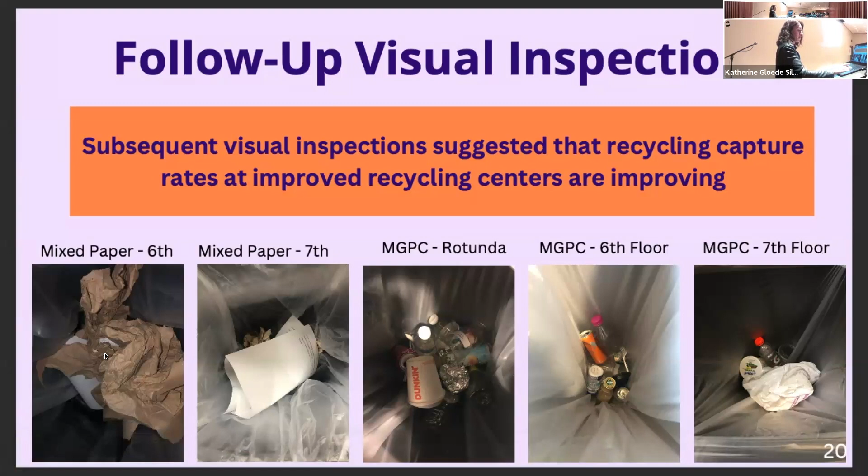We also focused on the second pillar, campus energy. We had many meetings, and I know Arthur is here from facilities. We had many meetings with the facilities management group to try and figure out what the building was doing in relation to energy management. We found out at the time that there were...

projects that had been implemented throughout the school to make it more efficient. Something called variable frequency drives had been upgraded, which is part of the HVAC system. There was a survey being done at the time, although it hadn't fully been green-lighted, to install LED lighting throughout the campus, and some of the buildings already had LED lights.

Also, we found out through this process and through facilities that there was a plan to install solar on the campus. And well, at the end, we'll announce.

And then there was the third pillar that we focused on, which was culture change. Actually, I feel like today here we can see the fruits of our project. Having you all here was part of what we had hoped we would be able to achieve.

So we hosted many events. We had an initial decarbonizing event. There was a sustainability public service announcement screening event, so on and so forth. We also put digital messaging throughout the building on many of the screens.

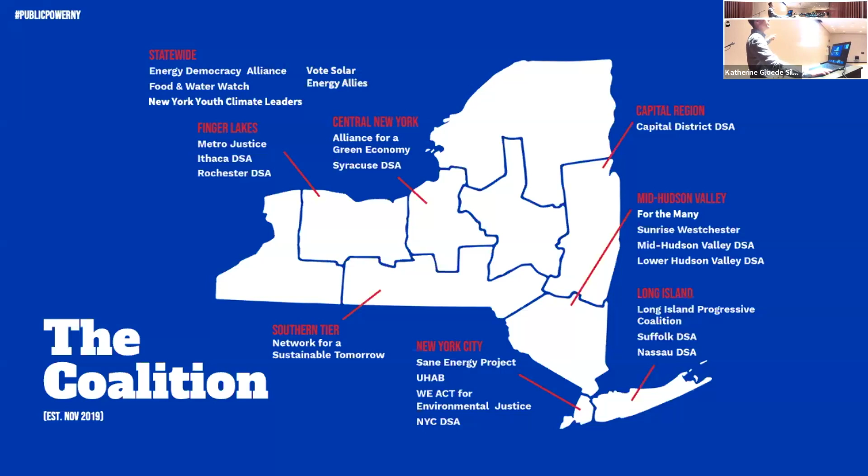And you can see it's a pretty heterogeneous coalition that we put together. It involves a lot of environmental justice groups, conservation groups, and a lot of political formations, including quite a few Democratic Socialists of America chapters around the state. It also involves our union here at CUNY, the Professional Staff Congress, as well as other unions. But PSC was really in the lead in getting a lot of other unions on board. So thanks and kudos to PSC.

All right, what were we doing? What was our goal, and what were we trying to intervene in? We're trying to change the grid. Now, the grid, as I've found over the last 5 years during my time as a public power activist, is really complicated. It's the biggest machine ever invented by human beings, basically. And there's a lot that goes on, a lot of technical stuff for a humble humanities professor like me to try and understand. But there are some basic points.

The grid has 3 key elements: generation, transmission, and distribution. And all of those things need to be coordinated carefully, because if you have too much generation and not enough consumption, or vice versa, the whole grid would crash and you'd have brownouts, which have life-threatening implications. Think about a hospital, for example—if the power crashes, people could be on the operating table, and suddenly it goes dark.

And this is also an environmental justice issue, because when the grid is not well balanced, what do for-profit companies like Con Ed do? They cut power to working-class communities of color. So those communities end up as the sacrifice zones in order to keep the broader grid going. We need to think about all of this as we fight for a democratic and just energy transition.

Our campaign decided that the best way to make this change and to basically decommodify the grid, to turn it into a public good that works for all of us in a just way, is to turn to an already existing public power authority. And that is the New York Power Authority, NYPA, the largest publicly owned utility in the US.

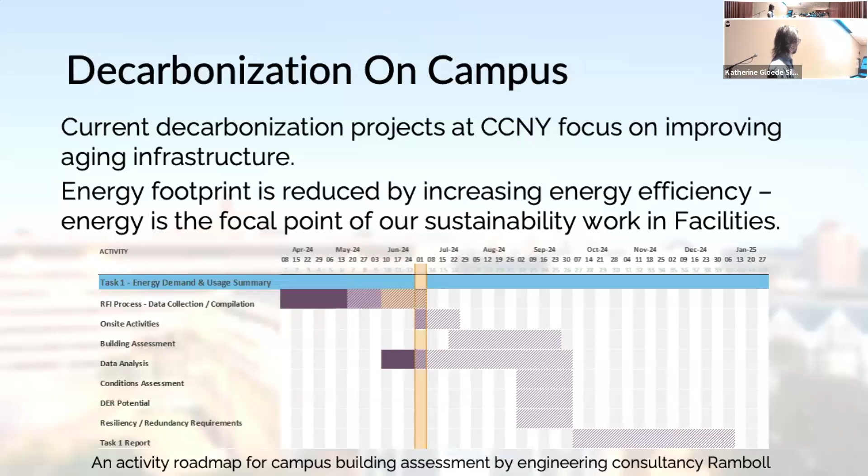We've decided that the main way we can do that is by improving our energy efficiency.

We're looking at variable frequency drives on our motors to improve the efficiency of our HVAC system. That's mainly because we have a physical plant that either completely cools the entire campus in summer at maximum efficiency, or heats it in winter. We're looking to address demand and use and be more efficient in general, so we're not running our motors at full blast all the time, whether heating or cooling.

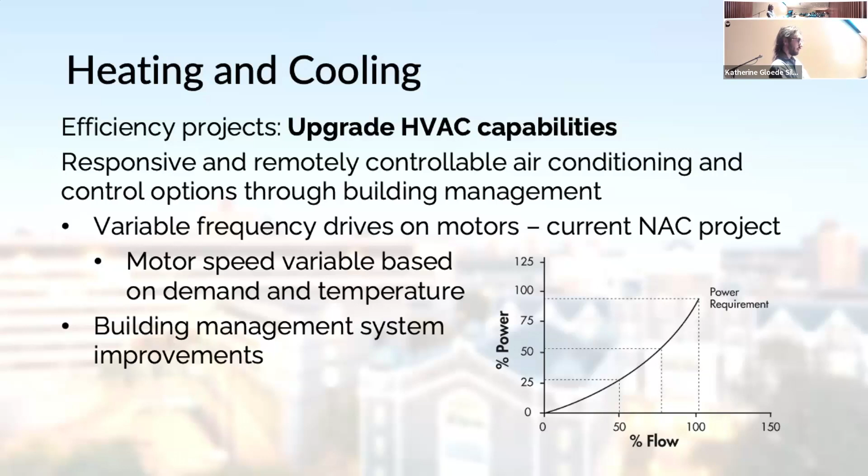To that end, we'll also be connecting everything to our building management system. We'll have professionals who can manage it better — this is just another way of improving our energy efficiency.

We've also got photovoltaics, solar panels. Today we're starting construction fencing at the parking lot, and then we'll go through a month of site work, after which we'll start building the panels. Within our first phase, we'll have electric vehicle chargers, energy storage, and the arrays. It's not the grand plan we have for the future, but it's our first step in having photovoltaics on campus at all.

We're looking into other electric vehicle charging stations, following Local Law 97 and Executive Order 22 to reach the 2035 goals of having all our vehicles be all electric. From there, we're moving with our light duty vehicles, the facilities use vehicles, and then our buses, which are running on natural gas right now.

These are our scope 1 emissions, not commuter emissions, waste emissions, etc.

Following that, we have our governance structure that has to push all of this forward. We can't do it on our own — we have to rely on the executives, operations, and planning. The governance council was established several months ago. They've had their first meetings, and it was a big milestone for us to get everyone in the room at the same time.

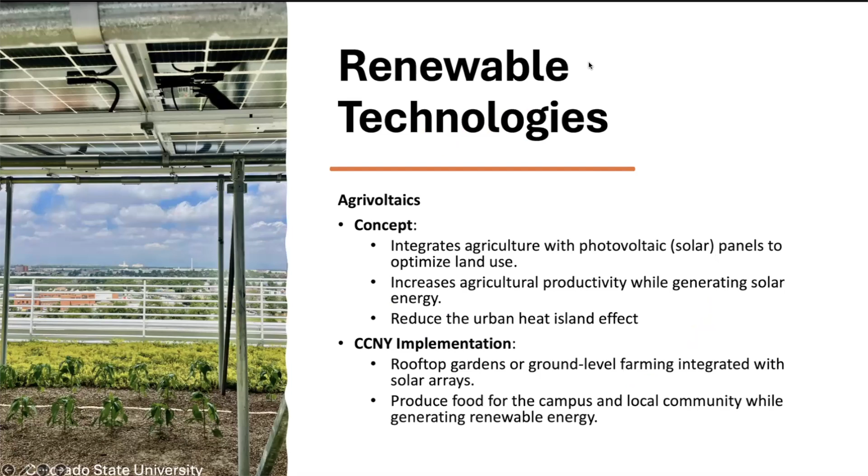Some of the technologies we're looking into: agrivoltaic panels that can be installed onto the roofs with small gardens that can produce produce for our campus cafeteria, and they also provide green roofs, which can contribute to lower urban heat island.

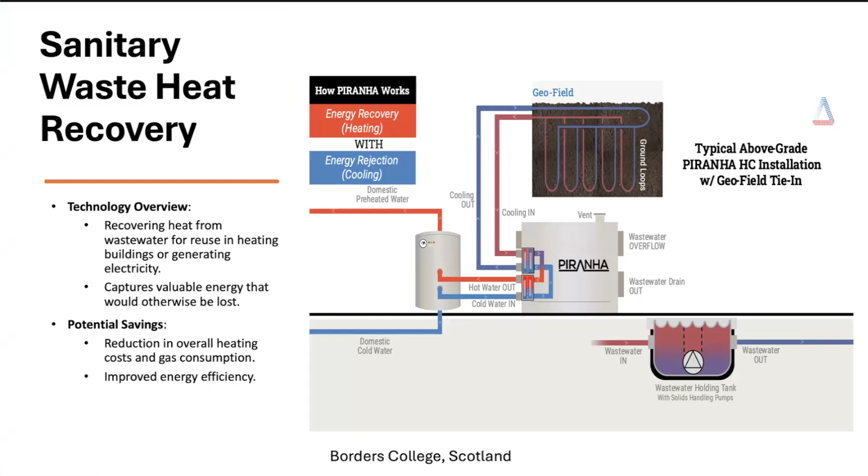Also, we can collect the sanitary waste heat from water and recover that for energy, as well as collect all the food scraps, as we've seen in the previous presentation, to reduce waste - which is going to be mandatory on all buildings by local law 22 by 2050.

It's an executive order - waste needs to be reduced, and we're proposing a biodigester on campus, which Jason is working on right now, to reduce waste, produce renewable energy from the gas collected and turned into energy, promote sustainability, and improve soil health, as this byproduct can be used to fertilize the soil on our green roofs. This is very cost effective environmentally, and it's a great educational tool on campus.

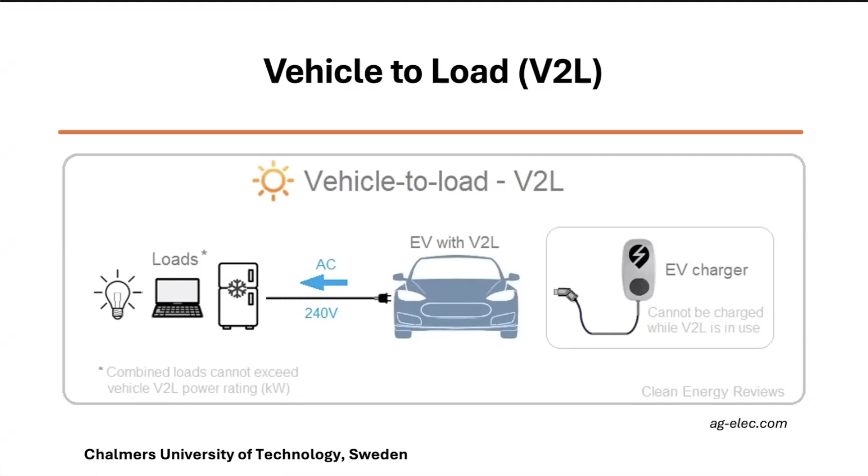Also, hydrogen generation - rainwater from the roofs can be collected and turned into hydrogen energy that can be used to provide vehicle-to-load and vehicle-to-grid energy. Vehicle-to-load electric vehicles can store energy and then provide energy to energize appliances or other systems, and we can all benefit from this. It's time to become more sustainable and less electrical-energy dependent.

I'm going to give it over to Jason - he's going to introduce these technologies into the grid right now.

I want to talk a little bit about why these technologies were selected and how we would implement them - the idea that we're going for here. So what we're looking to create are sustainable closed loop systems that rely on waste products to generate either heat or electricity. We want to take all the energy coming into campus, extract as much as we can, and keep it here. We want to incorporate these sustainable loops all around campus.

So this is loop one - the agrivoltaic loop. You can see we have a biodigester. The agrivoltaics rely on the PV system with the green roof - basically installing a green roof on the NAC with solar panels above it, and then collecting the organic waste from that to feed the biodigester, in addition to feeding it with organic scraps from the food facilities around campus. That would go into a combined heat and power plant.

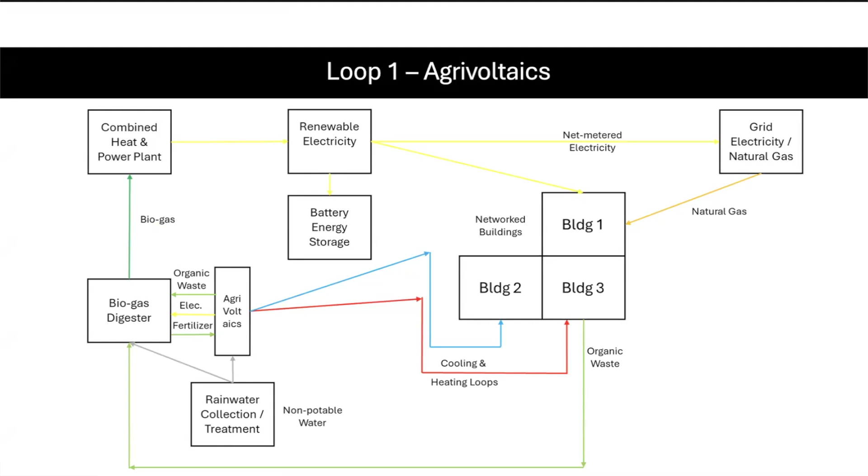The technology we selected for that was mainspring linear generators - a new technology out of Stanford which, using adjustable compression ratios, can operate off of natural gas and hydrogen, or a combination of both. It's a very versatile technology that allows you to generate electricity right on campus, and it's low temperature combustion, so it reduces NOx and SOx emissions.

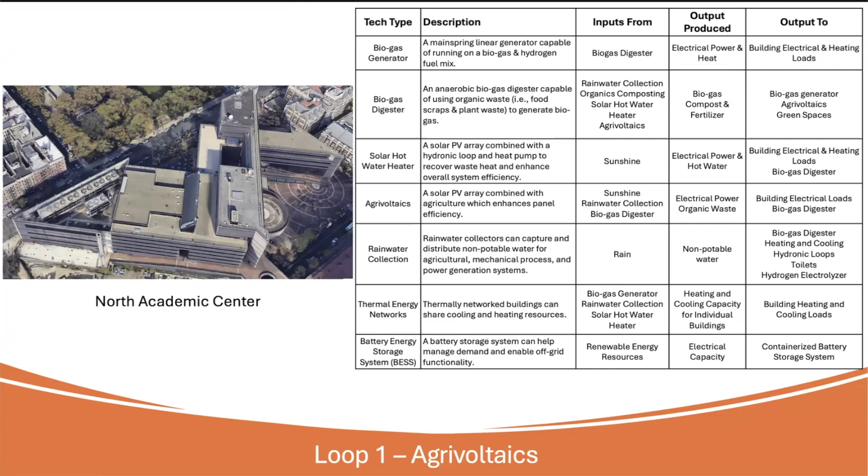The battery energy storage system, as Maria talked about, uses vehicle-to-grid battery energy storage - using CUNY's fleet to power, say, a cooling center during high demand days. And we still have connected grid electricity, but just extra - you can see the rainbow there. So this is one of the loops we identified.

When we first started, we were looking all over the campus. We honed in for the second semester on the North Academic Center because it is the largest user, and you can see the layout here and the number of technologies that would be applied.

So imagine a green roof, solar panels over it, a waste heat collection system on the back of solar panels for domestic hot water generation, and a biodigestion plant. This would basically enable us to lower the load enough that we don't have to install any additional capacity. One of my big recommendations is that we limit the amount of new heating and cooling equipment, new capacity.

So if we have 100 BTUs of heating on campus, let's not install any more. Let's use what we have. And then if we do need anything extra, we can take it from the waste. That's when the idea applied, and we look at this throughout campus.

So here's our waste heat, sanitary waste heat energy recovery. This would be collecting waste heat out of domestic hot water sanitary waste, i.e. the waste that goes down the drain. You pay to heat it, now we're putting it into the environment. So there's a number of benefits there. Again, it relies on the same kind of closed loop system, and you can kind of see the loop here.

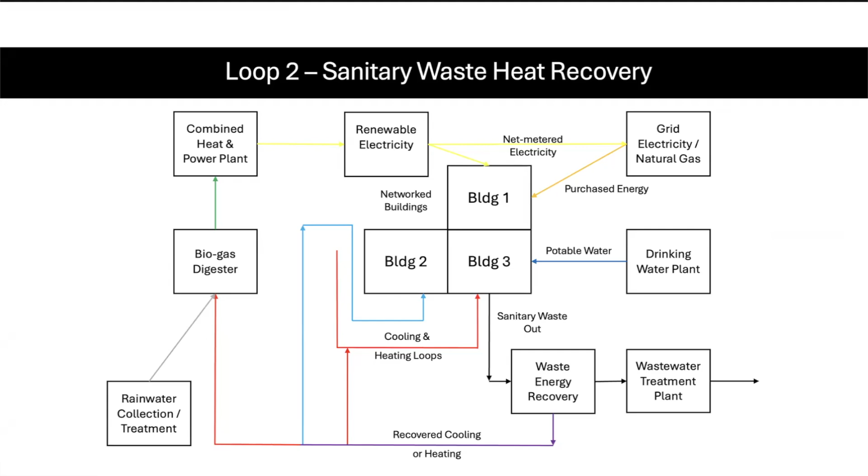And then we apply that one to the towers, which is the dorm building, because of the high sanitary waste output.

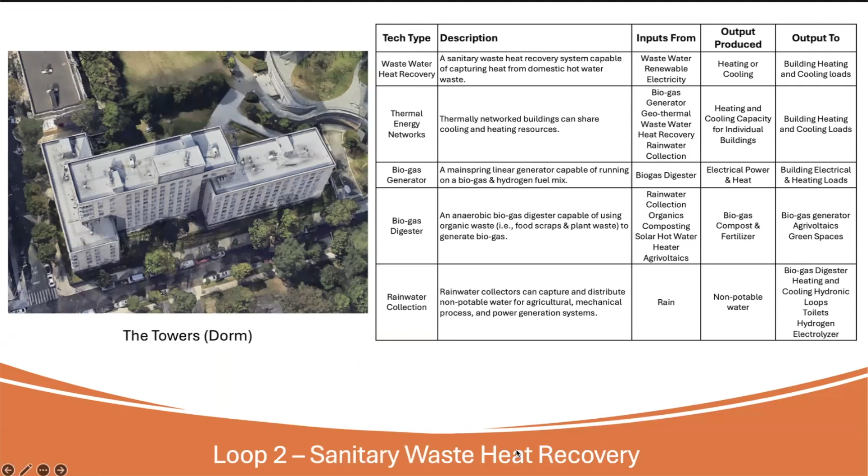And this is our electrolyzer rainwater storage. So one of the things we want to do is take the waste from the wastewater treatment plant, or sorry, the electrolyzer, and use the waste O2 to create a higher quality effluent, which in turn will use less energy at the waste treatment plant than just up the road here.

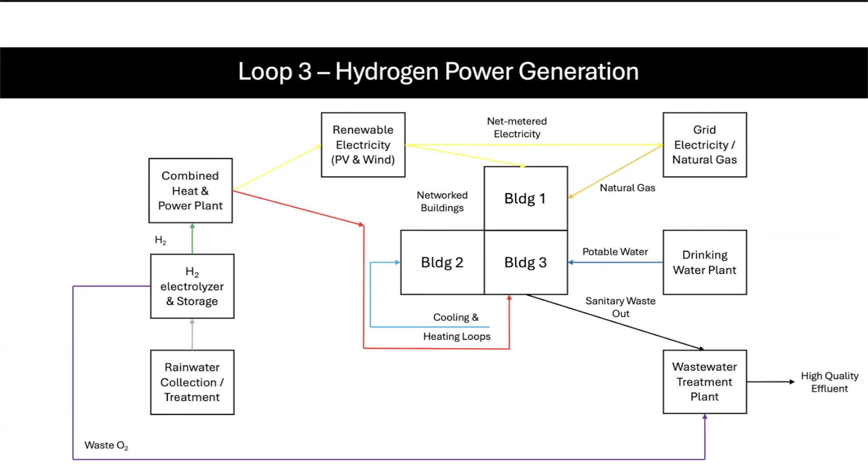And then these are some plans for where we might be thinking about putting it. Again, our second semester we're focusing mainly on the next steps, so we'll have more specific proposals for that this semester.

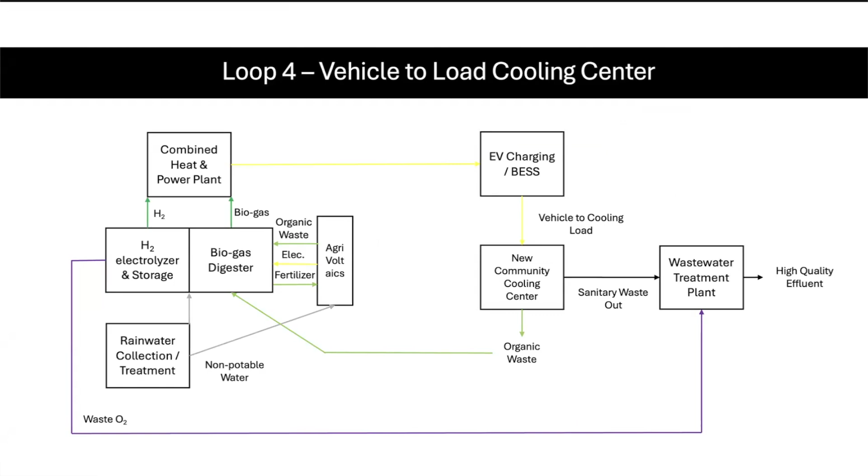So we have these great spaces on campus that are open for development. You can see this is just parking - green space being used for parking. So let's turn it into something. Let's recover our energy and put it to good use so we can accomplish our goals.

So Jason and Marie have done a great job talking about some exciting technology, and what that might look like on the CCNY campus. I'm here to talk about the really fun subject of how it's paid for.

So an important element of this project for us was that it be feasible from the perspective of something that can be submitted and actually actionable by administration of the school, and even potentially in other situations similar to CCNY. We're going to be looking at things like CCNY's capital budget, which the next slide is about, and potential grant funding. There's right now a lot of federal grant money for these kinds of projects that we are currently in the process of looking at. That is a huge job because the federal grant system is quite complex, but we have been working on it and going to continue to do that.

Long-term energy reduction obviously creates some cost benefits for the university, and that's a great way to sell decision makers here and in other places on this kind of investment. And then obviously we've been talking with personnel at CCNY about what it's going to take organizationally to have the bandwidth to do this. It's not just the money, but it's actually the ability of the existing staff to put these projects into place.

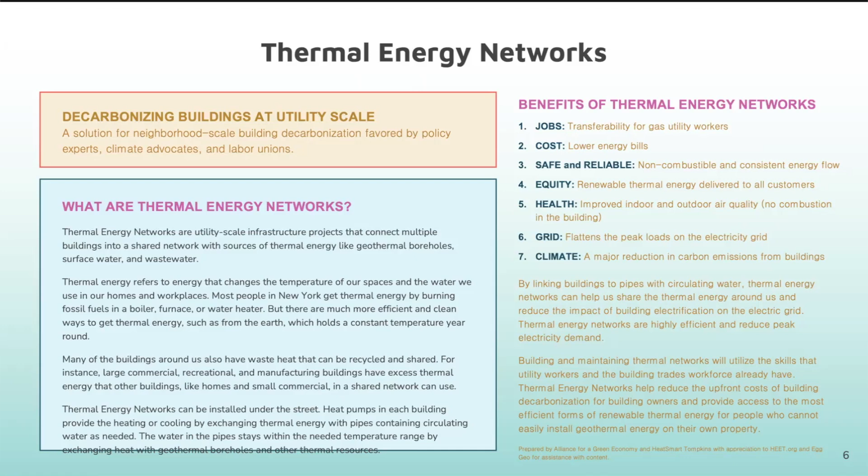They're basically a system that uses a network of water pipes to connect buildings with thermal sources and thermal sinks. Thank you to my colleagues from the capstone team for helping visualize what that means. You're basically using water to heat and cool buildings in a really efficient way, sinking that heat in some places and bringing it up in others as you need it.

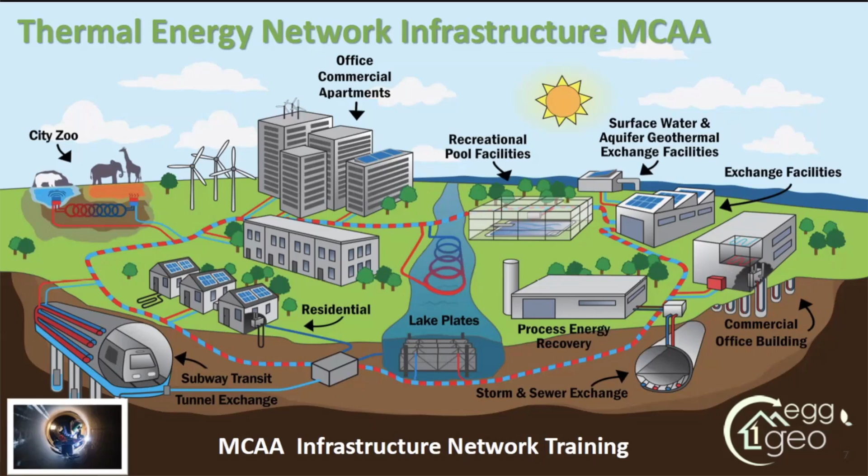You can interconnect whole groups of buildings to be heated and cooled by these water pipes, and you can use waste heat capture from biomass. There's waste heat everywhere—all kinds of it that we see all the time. In fact, if you're walking by, and I've noticed this dropping my daughter off at daycare, the NAP building specifically in the wintertime is venting all the steam into the air. We can capture that and actually heat buildings. There are so many sources of energy all around us that we just don't think about.

You're going to struggle to hear me editorialize between what I want to say and what I can't say. We're behind, right? We're way, way, way behind on these projects. I think we need this stuff to happen yesterday. I think each and every one of these campuses is equally important in terms of decarbonizing, and we really need to push the governor to act on all this.

So what else is happening around the state? Can you click on that text? Let's see if we can get—what else is happening? Oh, let's see if we can do it. It won't show? Yeah, right, that's too bad. You would have to come out of presentation mode. Start your presentation. This is—I don't want to get us too sidetracked. I really appreciate you doing that, by the way.